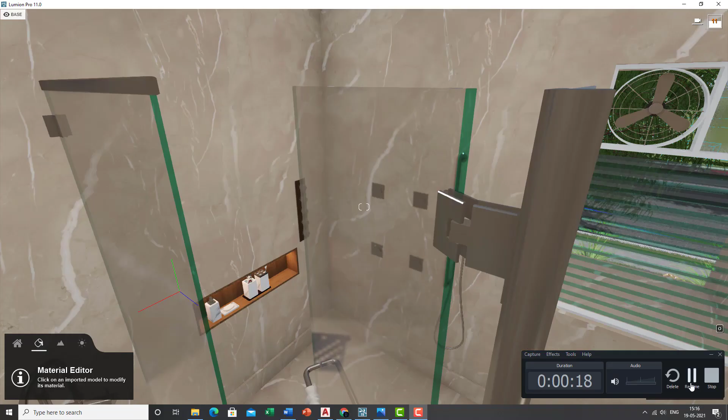Tip number 1. Always use two materials for glass. In order to create a realistic glass material in Lumion, you must first assign two different materials to your glass panels, one for the edges and one for the surface areas. Assign a mint green lacquered type glass on the edges and a normal colorless glass on the surface in order to create a realistic look.

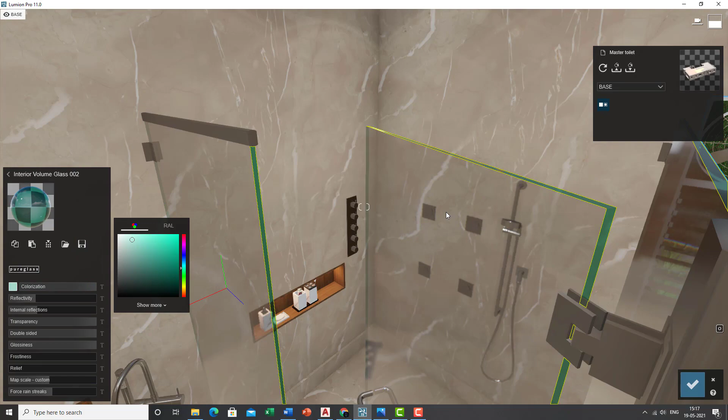Tip number 2. Always use a reflection plane for your mirror in order to get detailed, realistic reflections from it.

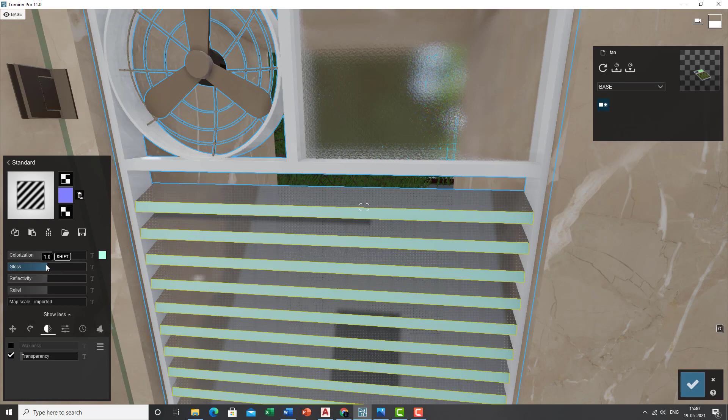Tip number 3. As Lumion is still not capable of reflecting or recognizing glass in mirror reflections, use a standard material with high gloss and reflectivity for surface areas and low gloss with high reflectivity for the edges. Then set the transparency slider as desired. This works well for small glass panels with a bit of tweaking in Photoshop.

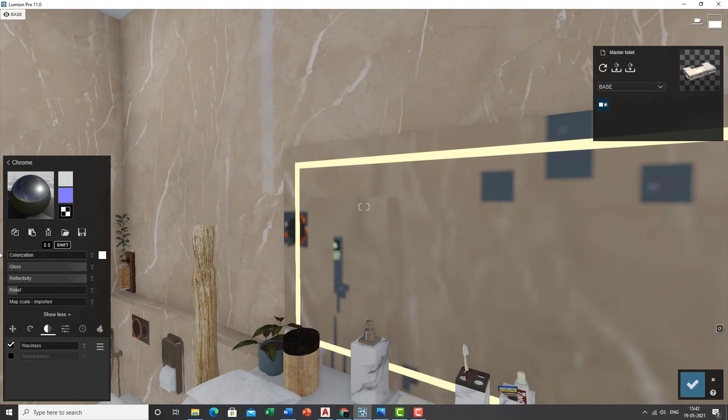Tip number 4. As most of us use the chrome material for glass, reflections might appear a bit darker than the real scenario itself. A quick fix is to bump up the color to near white or as desired. It's a trial and error method basically.

Tip number 5. Using sharp shadows will help create realistic shadows visible from mirror reflections.

Tip number 6. Reduce the hyperlight value in order to create an equal balance of lighting between mirror reflections and the interior areas.

Tip number 7. In certain scenarios like this, do not use reflection planes on glass areas in order to get realistic mirror reflections. Using reflection plane on glass hampers the mirror reflections, thereby generating improper final reflections.

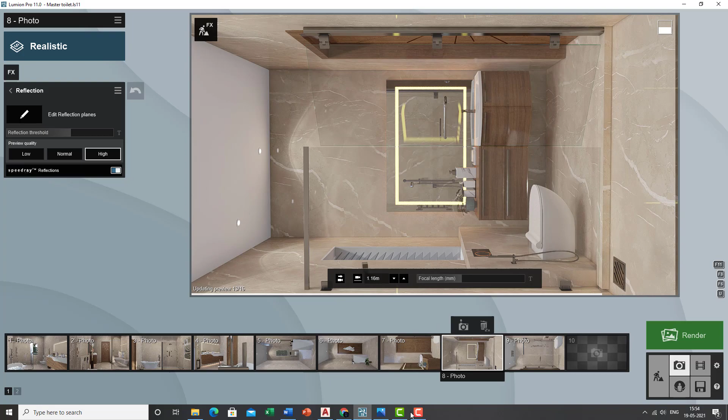Tip number 8. While rendering interior scenes, especially with mirrors, turning off the skylight and speedray reflection button will definitely help create realistic renders.

Tip number 9. Use the specular slider in advanced settings for mirrors to set light glares as desired.

Last but not the least, use the double-sided value for glass materials in order to create realistic renders.